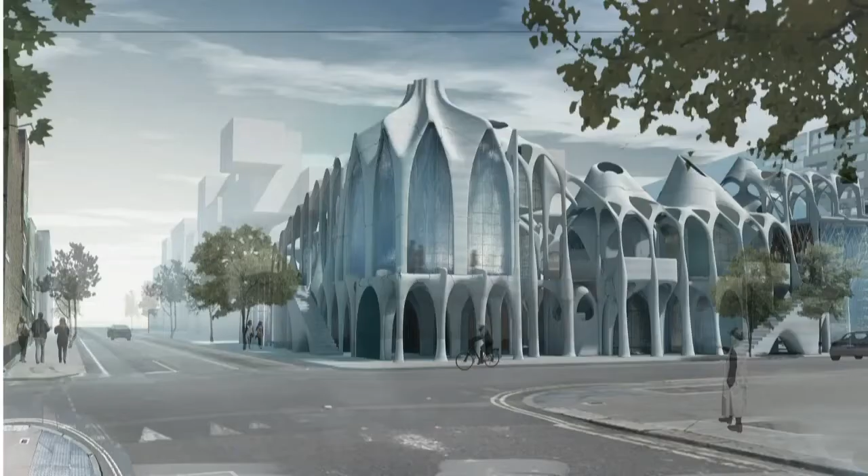We're part of Nahmad Bhooshan studio, which deals with the future of living and mass customization in combination with computational technologies. We're proposing a negotiated commune system that provides custom-tailored homes to cohesive communities based on their existing social networks in order to establish sustainable local communities. Using a relational model, our project looks at generating buildings based on social relationships in a community.

On the next scale down, we're proposing a customization system where the housing configuration is defined as a matrix of parameters, allowing the architecture to respond to daily patterns of each individual in the network. Additive manufacturing in clay-like materials using industrial robots is investigated as a fabrication technology that can deliver mass-customized integrated dwellings.

First, to expand a bit on the larger discourse of this thesis, increasingly modern cities like London are laid out for people who fit into a certain demographic. Young, single, high-income professionals who have very flexible lifestyles thrive in this environment. But what about the ones who are not so lucky to fall under this demographic?

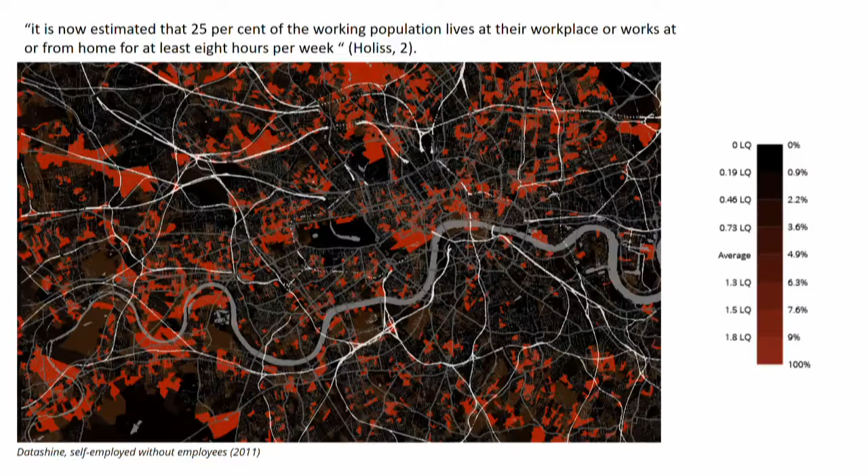This thesis investigates possible solutions for a user base that typically makes up the backbone of local communities, yet is routinely ignored by commercial developers: craft workers, small business owners, stay-at-home moms and dads, artists, people who are less flexible and tend to stay in one community for a long time, who contribute and depend on these communities for their livelihood. In the UK, an estimated 25% of the working population does some kind of work at home for at least 8 hours a week, but most housing projects do not address this segment at all.

One way communities have successfully created their own homes is with co-housing. The term is used to describe a model where communities self-finance and build homes, cutting out middlemen with commercial interests. In the UK, there are about 60 registered co-housing projects, some of which can be found in London, but it is far from being the norm. We see an opportunity here to reinvestigate the live-work typology in combination with co-housing in order to create an alternative housing model.

At the base of the research lies the hypothesis that human settlement patterns need to become an intimate reflection of their communal structures in order to form strong, sustainable communities. Historically, humans have lived in cohesive communities where they dwell and work together intimately. This is reflected in the architecture, which takes specific forms based on the community. We have looked at different ways to understand and analyze these patterns. Insight gained from complex network analysis methods and space syntax helps us develop the operational tool to approach architecture from a social angle.

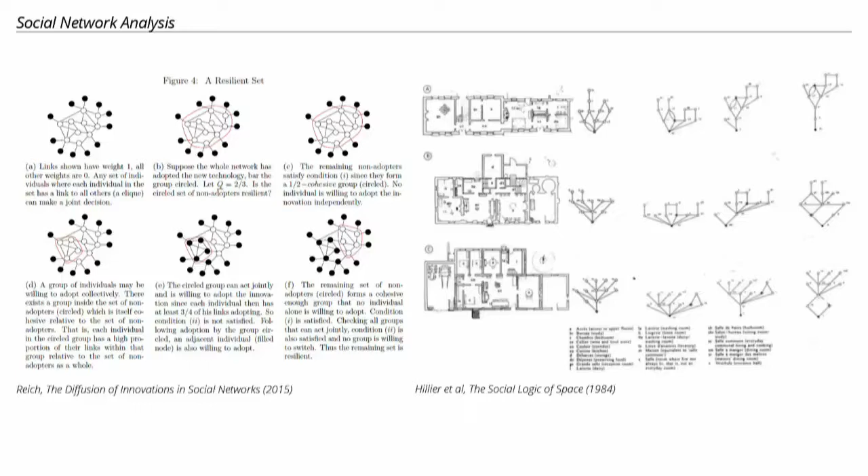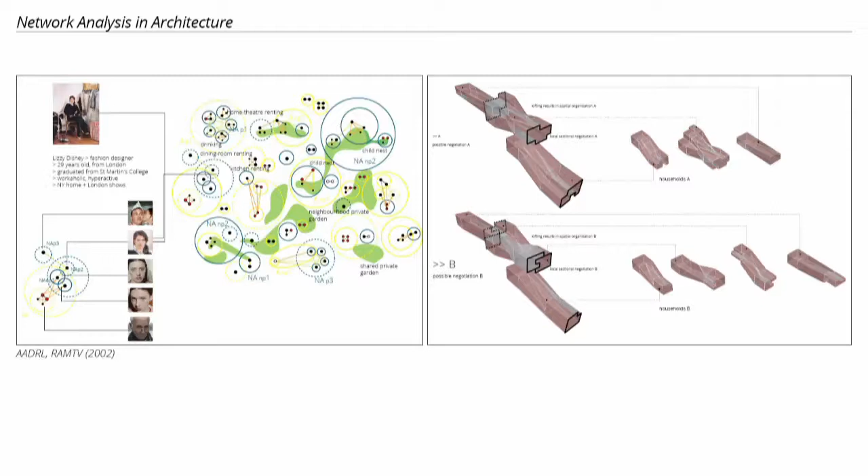The vernacular working home, as outlined by Frances Holliss in her book Beyond Live/Work, provides a base typology for custom-tailored homes. Historically speaking, there's a wide variety of custom-tailored homes that are optimized to the user needs. For example, the English Topshop or the Japanese Machiya are highly successful counterexamples to the generic developer blocks. A prior DRL project, RAMTV, explored the idea of working with a network of users in order to tailor a negotiated mass-customized solution.

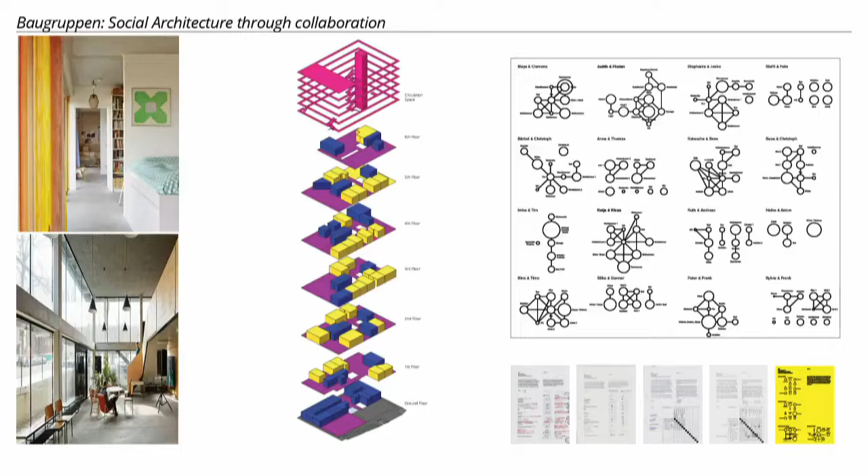R50, a co-housing project in Berlin, provides insight into how to design for communal building projects. The highly successful German Baugruppen shows how to engage with an existing community and deliver user-centric housing. And also, there's a huge potential in freeform 3D printing, as it can collapse several layers of complexity in the fabrication process. However, 3D printing at the architectural scale is still in its infancy and lags behind the engineering aspect. Our focus is on design application.

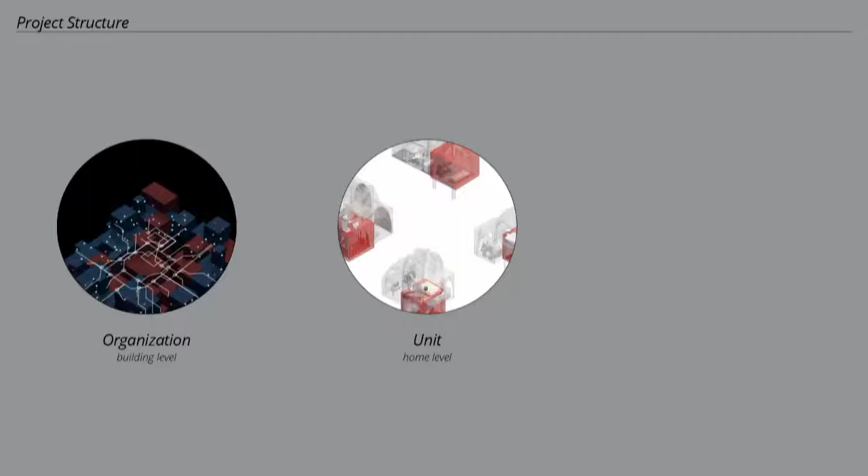As our architecture is a compression-only system, unreinforced masonry construction provides insights into geometrical constraints. The geometries developed by Gaudi, Guastavino, and Dieste provide case studies. Now coming to the project, the process can be broken down into 3 levels of development: the larger organizational level at the building scale, the unit level, which looks at the individual homes, and the structural level, which deals with the construction system.

All right, starting with the organization. During the research process, we have identified sites of varying nature. Our current testing site has been chosen for several reasons. It is located near Elephant and Castle in London's Southwark district. It is currently occupied by a luxury apartment complex, which is the standard type of development found in London today. We are borrowing the site to propose a hypothetical alternative that could bring more to the local community.

It is located right next to Pullen's Yard, a 19th century housing block purpose-built for craftspeople and traders. When manufacturing disappeared from this area, the workshops were converted by artists, designers and artisanal professionals into live-work spaces.

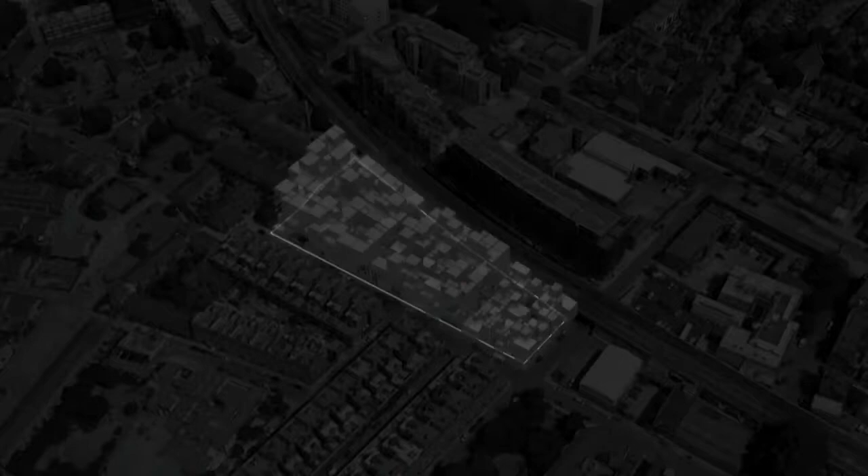Today, the complex remains an important anchor point for the local community, providing services and public events. We see our proposal as a contemporary addition to the community, reinforcing this vernacular typology rather than pushing it out of the city. The site is shared by 3 different communities, each with its own identity. We focused on one of them for the design development.

This prototypical community consists of 16 households or 35 people. Through a series of conversations and questionnaires, relevant data is captured in the relational roster. For each household, we record its existing size and composition. We also record the characteristics of the previous home and the desired spaces and their square footage. With a relational bubble diagram, we also capture how these spaces should be related to each other.

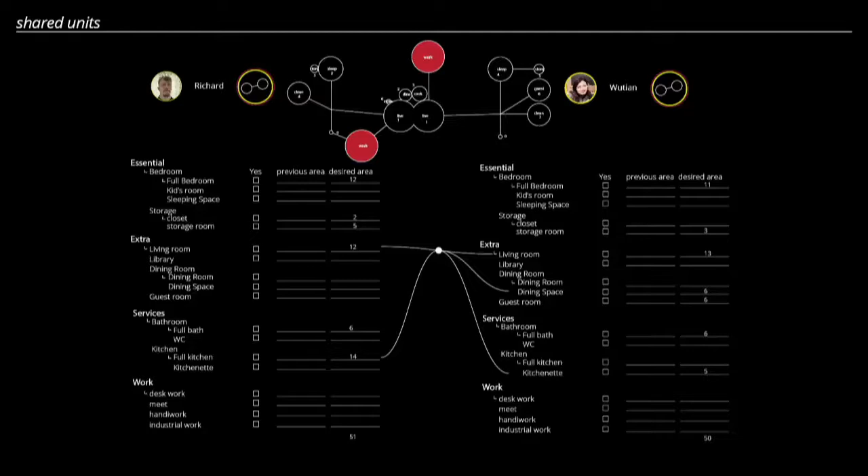Some households may be willing to share spaces in order to cut down on cost, but they might also have some kind of symbiotic relationship. For example, one of them could be a caretaker and the other an elderly person. In the same manner, the community is interlinked through a network of productive relationships.

The graph is useful because it allows us to capture all relevant information into one data structure that can be operated in an algorithmic way. The graph is multi-scalar, revealing more and different information as you zoom in. However, for the computational side, all that's really needed is a data matrix that records the connections and type of each node. One example is shown here on the screen.

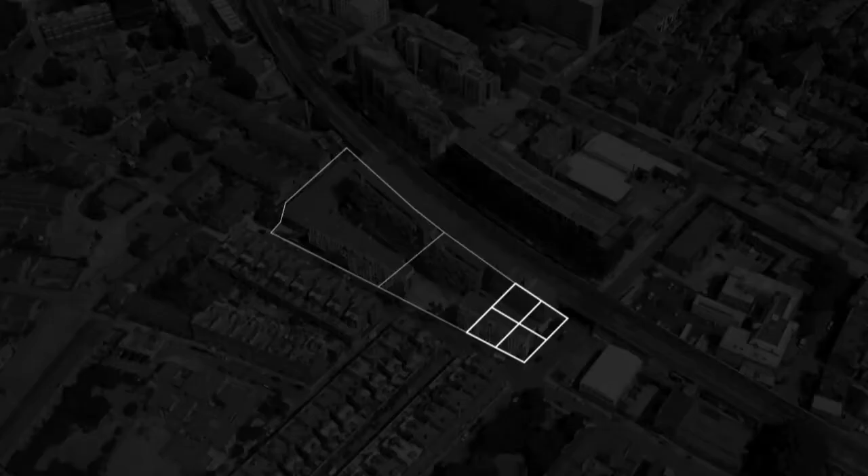Coming back to the site, it is first subdivided into a 3-dimensional grid. The grid acts as a world for a growth algorithm to operate in. A pathfinding logic is then used to generate schemes. Basically, we have a starting point where a pathfinding agent is seeded. Following its rule set, it places units at a specified interval, traversing over the site.

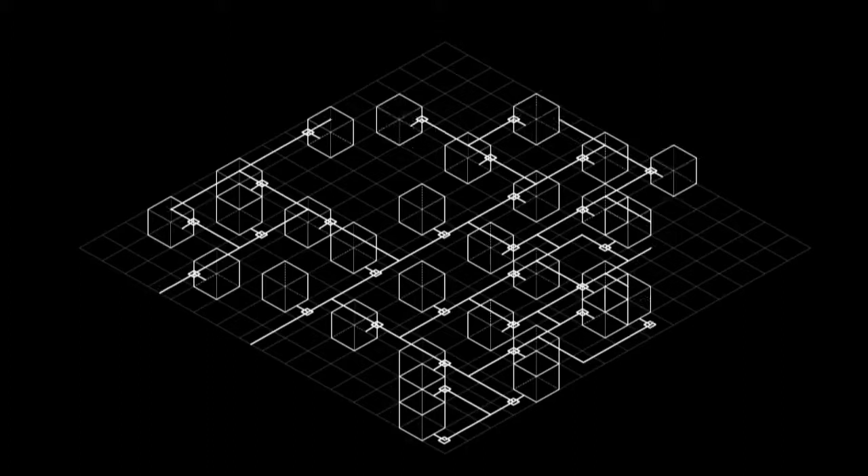The rules are simple, but they can be stacked to form more complex behavior. For example, turn randomly left or right when hitting a boundary, or branch every time a unit is placed. These rules give us distinct tree-like structures, which become the circulation of the building. The movement is further controlled through a cost-to-move system. For example, traveling vertically carries a much higher cost than just traveling horizontally.

For a test site, we use the rules: nodes are sorted by largest amount of connections, branch every time after a node is placed, and every unit has to touch the perimeter. Here's the same process shown again with each unit mapped. The growth logic is additive, so the placement of each unit is affected by the ones placed before it.

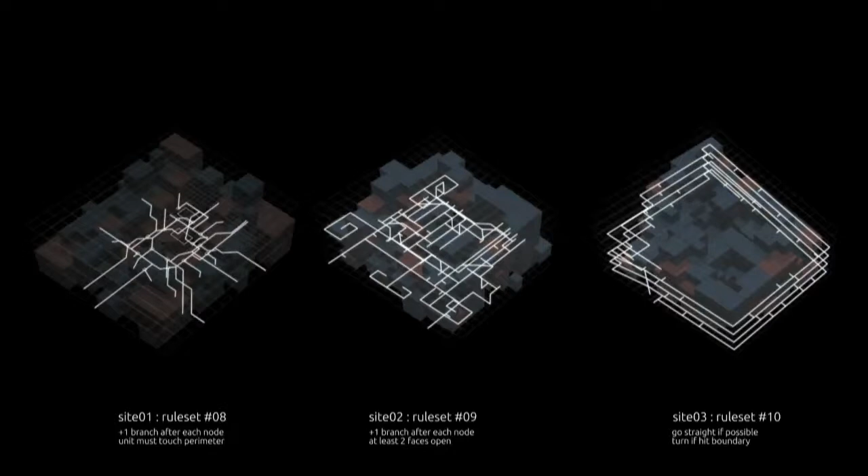Simply put, the algorithm can be explained as a game of Tetris in 3 dimensions, with the rule set as an operational driver. Here we have applied a different rule set to each site. You can see the resulting growth trees are very different from each other. The growth trees can be interpreted as the quality of the space. For example, site 1 has an active center hot zone, whereas site 2 has a more distributed scheme with active pockets. Site 3 has a very active perimeter with a private center.

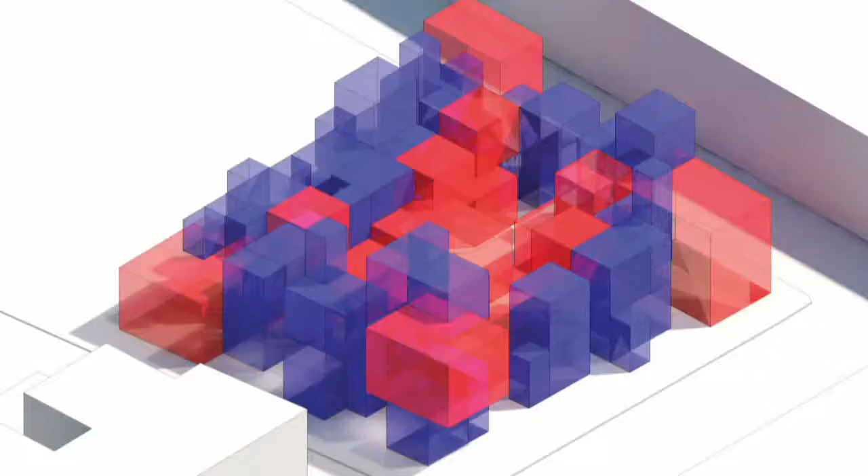Now coming to the unit level, based on the rule set, we get an organization of spaces that satisfy the requirements of the community. The actual units on site are a negotiated result where site constraints, unit requirements, and shared activities come together. Using a relational model allows the unit to adapt to the site while still maintaining its important connections. From here, a low-poly version of the architecture is inserted.

We have further developed a strip containing 5 units. The configuration attempts to match the original input given by the user, resulting in unique units that fit into each other. Shown here is the process starting from the initial data sheet and relational diagram to a 3-dimensional representation using metaballs, and finally the unit.

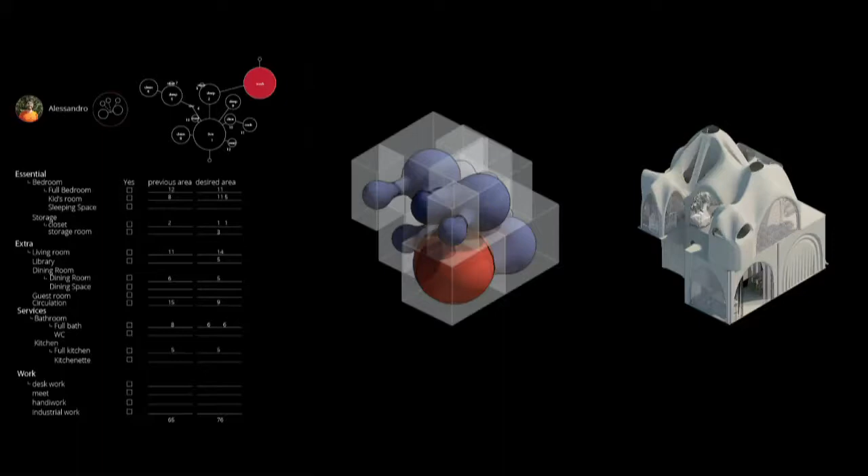Each home is customized based on the needs of the user. The unit comes with an extra programmable workspace, and depending on the user, it interfaces differently with its surroundings. In this way, each unit is given a further level of customization.

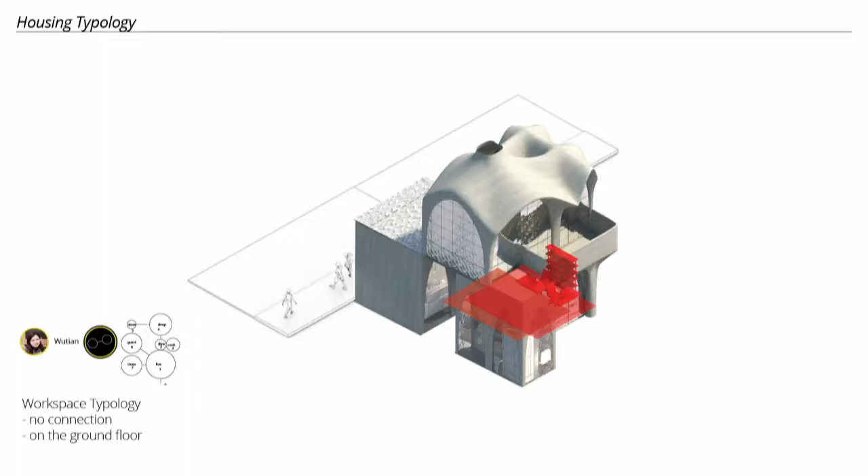Amy is a ceramic artist. Her unit is located on the first floor, facing the busy first floor common space, giving her works exposure to the local community while also helping her to build connections. Richard operates a small coffee shop on the ground floor, facing out to the street. He also helps Amy sell some of her work on the site.

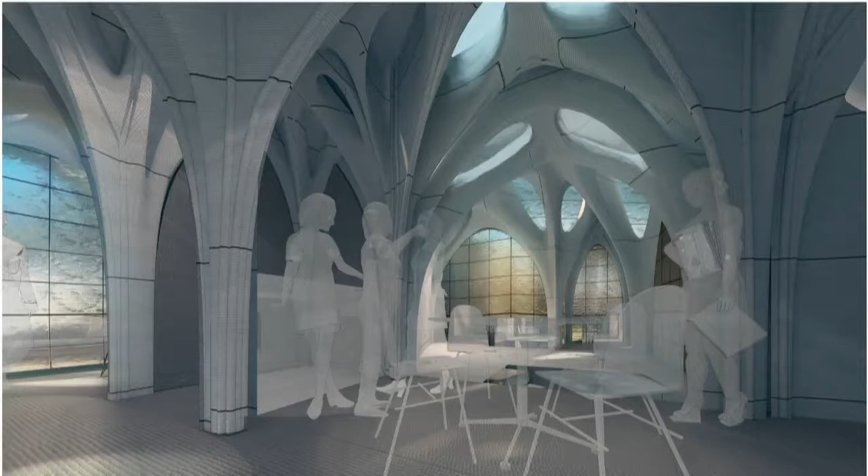Alexandro is the community manager. His workspace is on the ground floor, directly opposite the common meeting space, thus making him easily accessible to the community. So shown here is a shared living room between two units. The articulation of the branching of the ceiling allows different levels of light to reach into the unit, thus allowing us to optimize it for the activity underneath.

Here's the living area of the single unit. Here you can see how 3D printing is used to print different elements of the building, such as the windows, walls, stairs. The break lines of the 3D printed segments become an architectonic feature of the space.

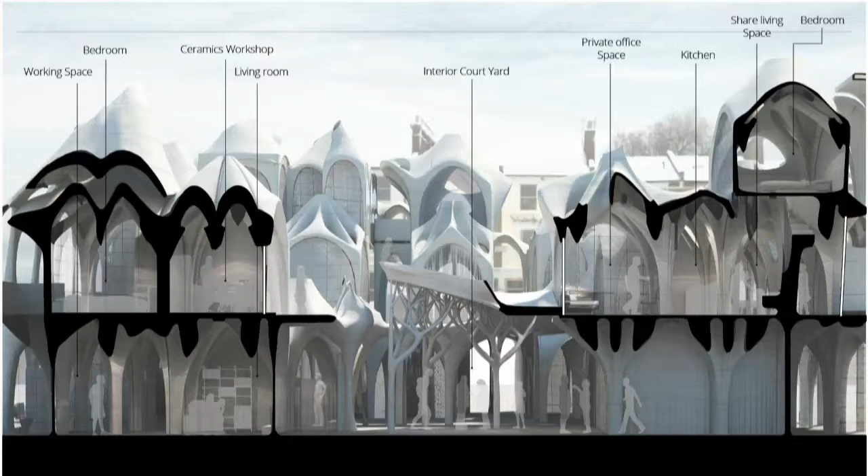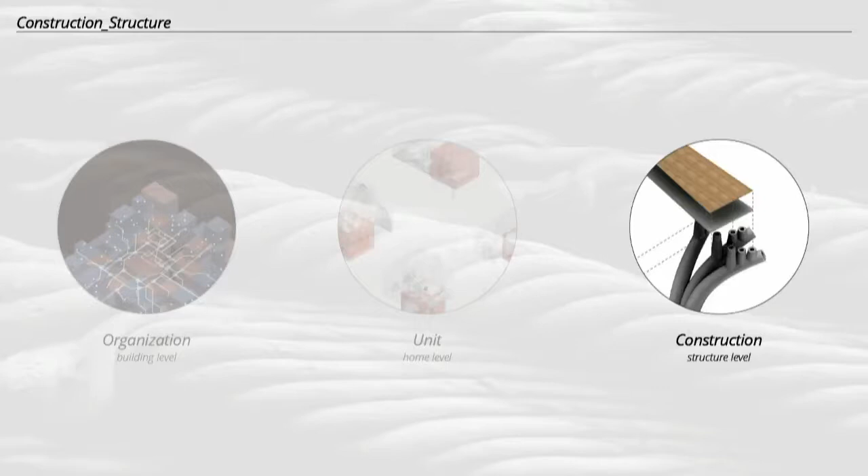Lastly, we come to the structural level. Using 3D printing, we aim to simplify the construction process as much as possible in order to make building homes less reliant on developers, while still maintaining a highly customizable system. We have developed a process where, starting with user requirements and social relationships, a building organization is generated.

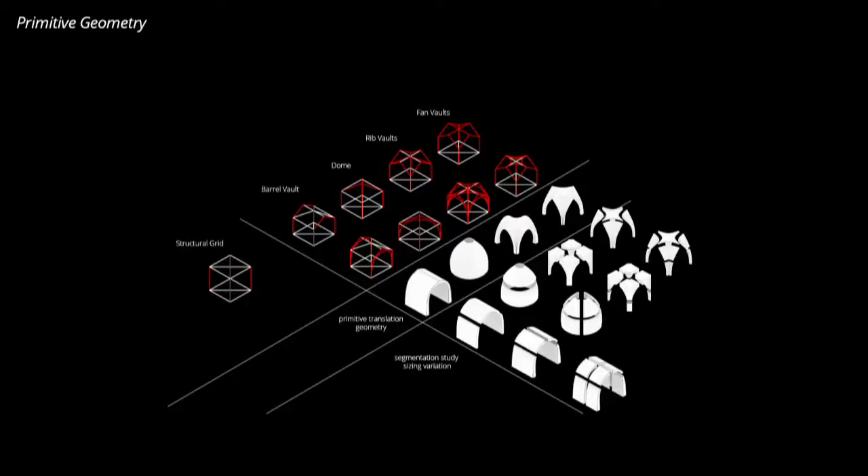Using the edge lines of the cubes, primary compressive forces are calculated for structural integrity. The resulting geometry is further segmented. Function and textures are added at last. The grid-based organization was chosen because it is developable, meaning we can extract structurally sound geometry. Here you can see how a single cell can translate into a variety of different structures, going from grid to structural center lines, to low poly geometry, to segmented printable pieces.

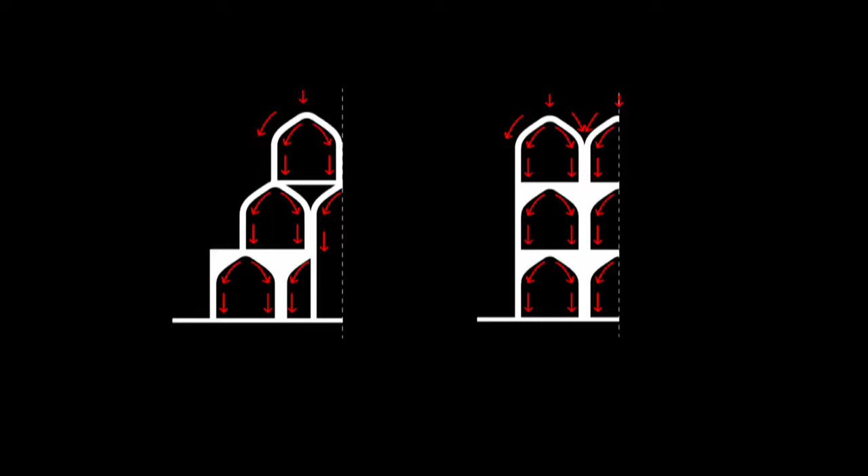3D printed clay and similar materials are very weak in tension. That's why we are borrowing insights from unreinforced masonry construction and other compressive systems. The grid-based aggregation allows us to extract center lines that line up structurally, thus optimizing the geometry to its structural qualities.

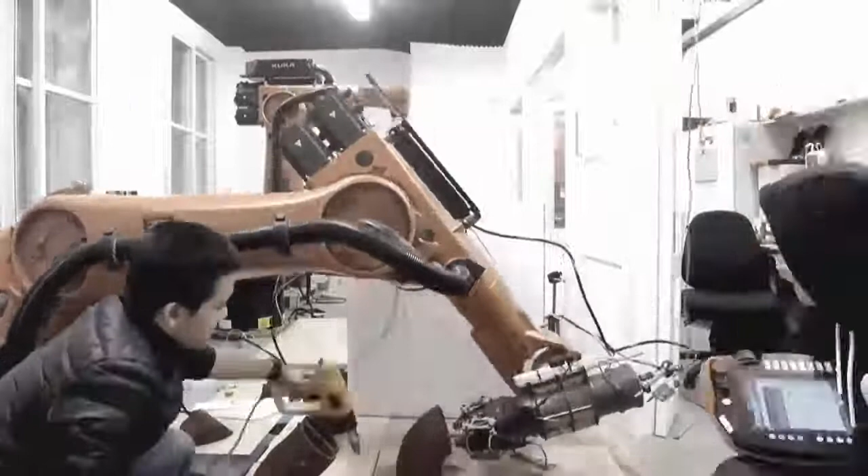We use 3D printing as the main fabrication technology because it removes a degree of separation between the end user and the construction process. Highly customized and very differentiated geometry can be fabricated without any added complexity. Using one single construction system for most architectural elements simplifies the process considerably, thus minimizing cost and effort, making it viable for a wider user base.

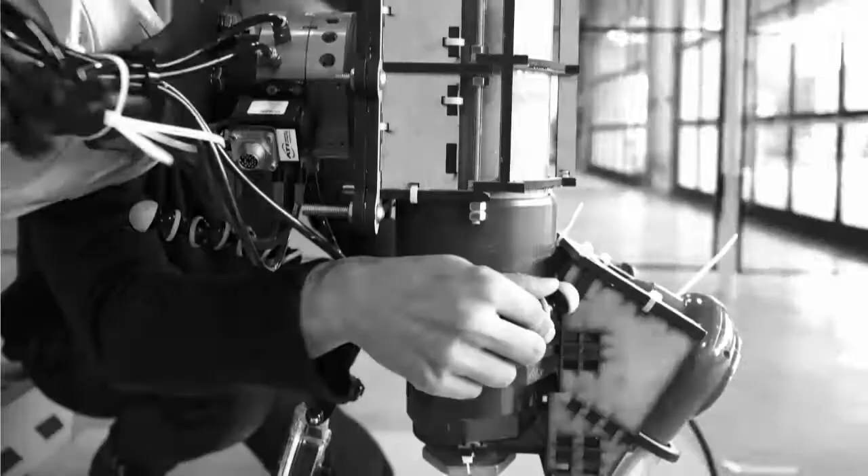In terms of construction, we are proposing an on-site fabrication system where the whole construction assemblage comes as a streamlined package, portable on a standard cargo truck. We chose to develop a pneumatic system with clay as base material because of its low cost and because it can be built using the limited resources that we have. Clay is also easy to find locally, not to mention that it is the oldest building material in the world.

We also understand clay as a proxy material for materials with similar behavior but much higher technical difficulties, such as concrete. It is important to mention that the material has inherent limitations. Not everything is printable. The first step for us was to establish these limitations. We have developed parameters in order to build a geometric system that is inherently constrained by printing limitations.

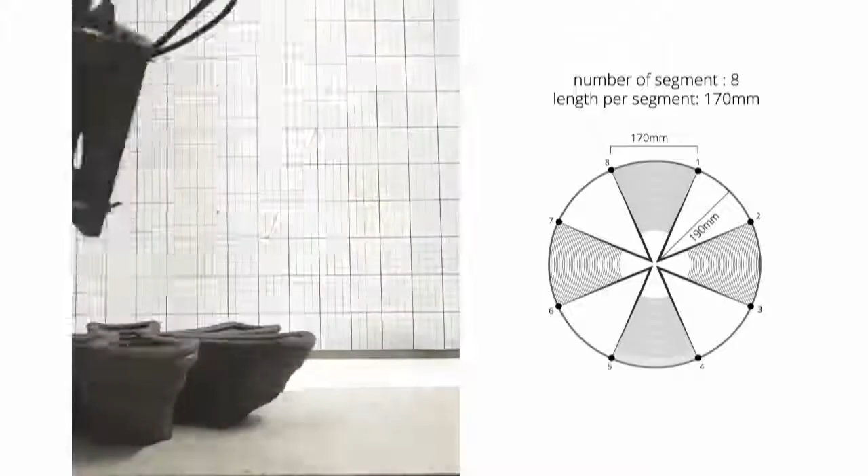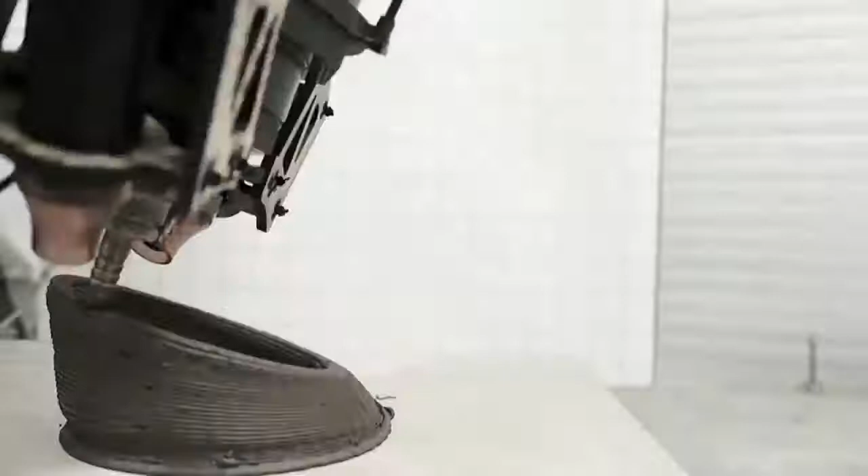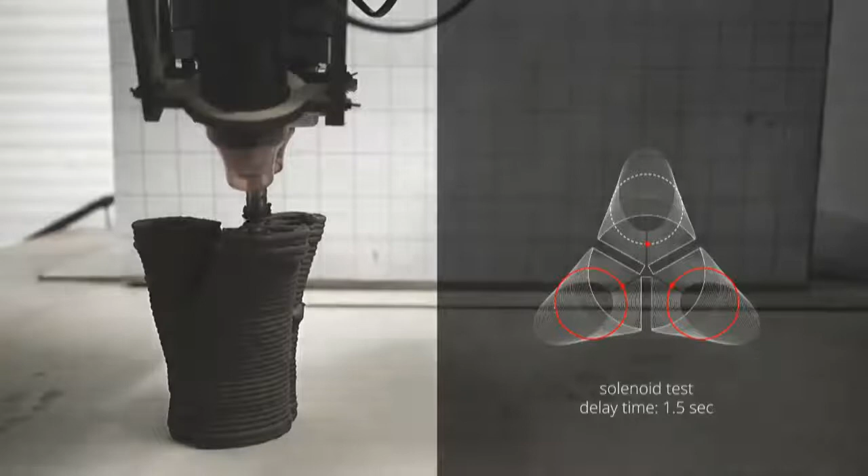Parameters that we have tested are maximum overhang angle with simple layer by layer, maximum angle using non-horizontal planes. Here we have also discovered that the accuracy of the tool center point, or the TCP, matters. Same experiment with fixed TCP adjusted to the shifting planes. And also flying layers for openings or perforations and its capacity to recover. Branching geometries using non-continuous printing. So based on these tests, we get certain forms that are printable and useful.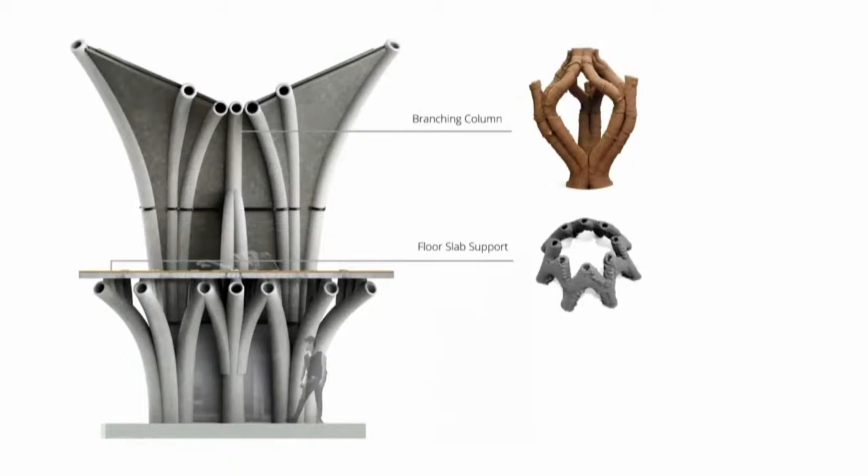3D printing makes it possible to fabricate different elements of a building using one method, that includes structural elements such as columns, walls, and floor support, performative elements such as different ways to create openings for light and ventilation, and mechanical elements for plumbing and electricity.

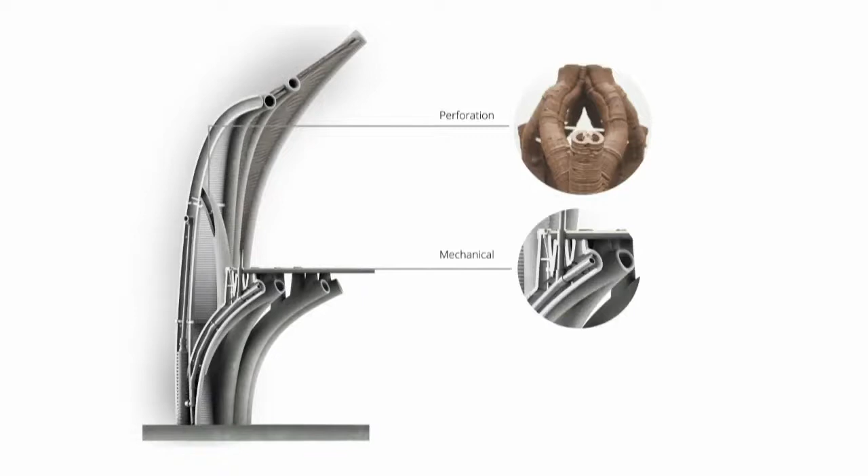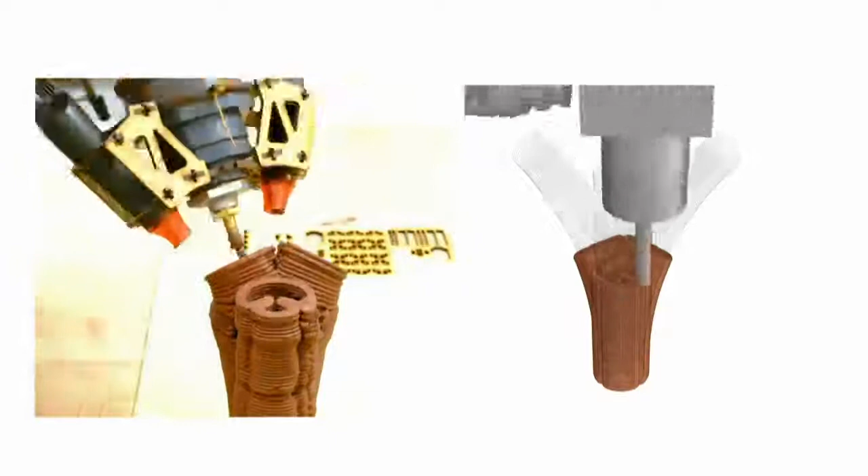And ornamental elements, which basically come for free as a side product of the printing process. The structure is segmented and not printed all in one go because of material limitations and because printing at an architectural scale has complexities that are hard, if not impossible, to resolve with one solid print.

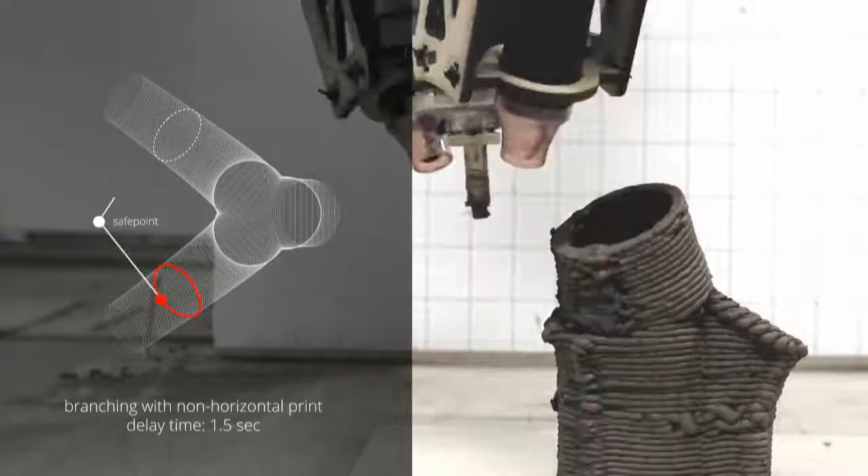First of all, segmentation allows us to limit failure to local prints instead of the whole structure. Secondly, timing is very important with materials that need time to dry or cure. With all of our larger prints, we have to let it dry periodically and after a certain height so it can support its own weight. And third, with our branching structures, choreography is an essential part of the print. For example, safe points have to be added in order for the robots to avoid crashing into the print.

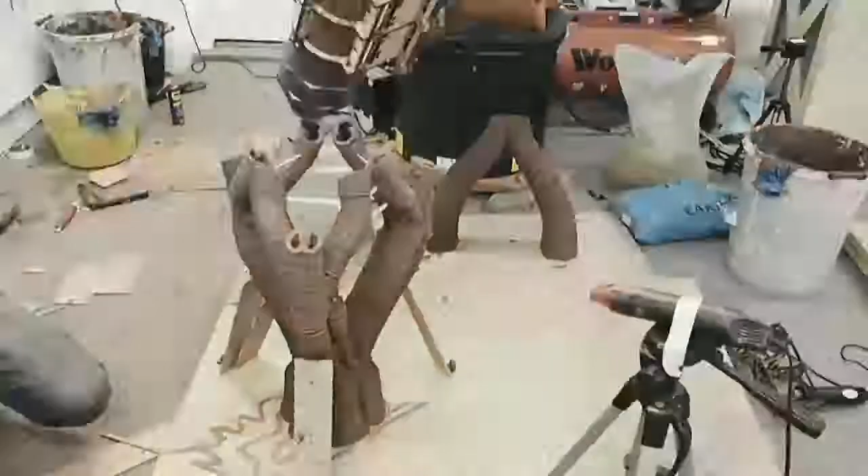As a result, we have developed a process where the structure is printed on site, but it's segmented in time. The first shows the printing process of our final prototype, where we tried to combine all the techniques we tested. It is one single object, but segmented into 3 prints. In between, it is allowed to dry, but also it optimizes the toolpath for the robots.

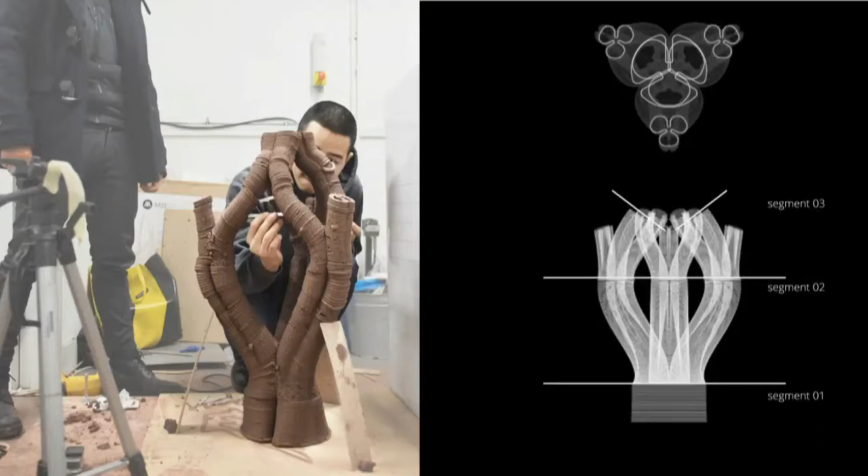The size of segments depends on the material. For example, glass has to be printed in a high temperature environment, and it's inherently limited to a kiln, whereas concrete can be printed at much larger scale. To this end, we studied different ways of segmentation and how to resolve connection points.

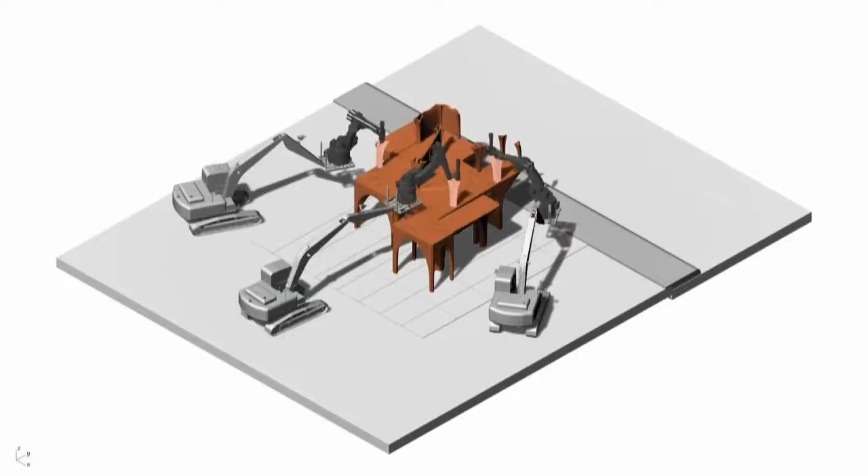This video shows the construction sequence of one unit. Starting out, the truck carries the robotic arm and is constantly calibrated by beacon signals. The segments are printed following the choreography of the robots. Shown here is the printing process of the main structure. So this concludes our presentation.

We'd like to give special thanks to our tutors, Theo, Shajay, and Alicia for their insights and advice, and AKT II for structural consultation. Also Angel for generously letting us go wild in the robot room, and of course our phase 1 helpers, Sam, Cesar, and Charlie for helping us pull together at the end. Thank you.

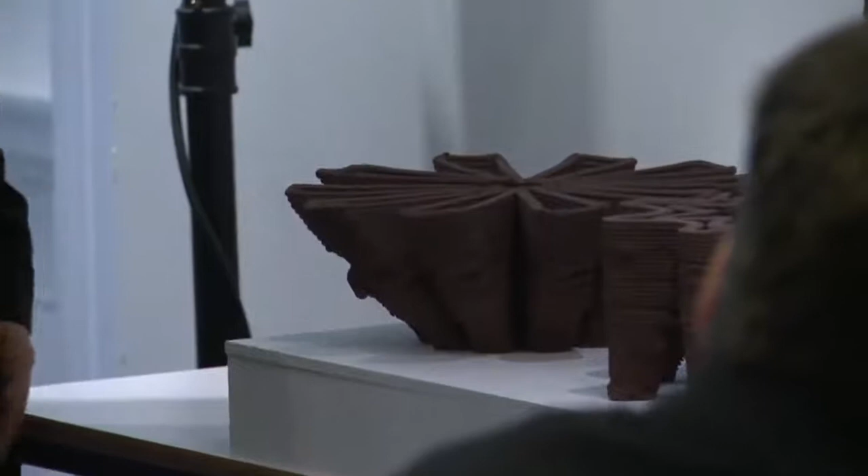So right here it's a series of study models that we've done with the flying layer for the opportunity to create a perforation and an opening. This is the series of studies for the layer by layer overhang, how much angle can we go. And this one is a series of branching models where we study the choreography of the printing robot.

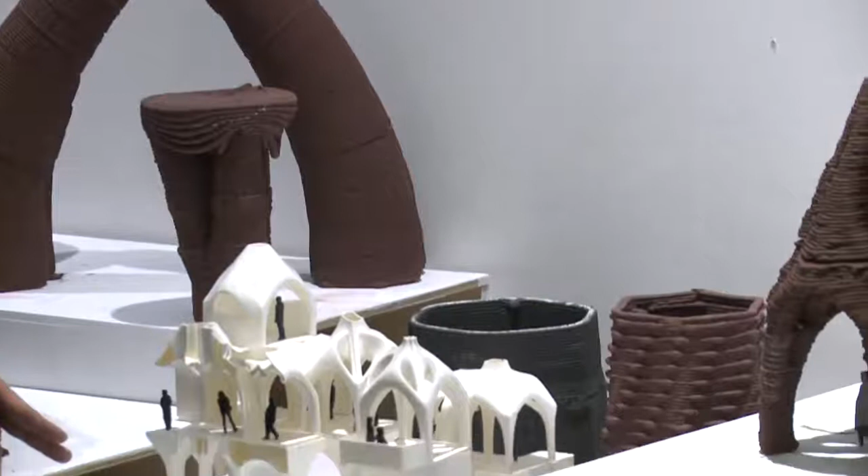This one is the 1 to 25 model of some units in our scheme, printed in plastic, and this one is the clay version of it. This one is the pneumatic clay chamber that we developed, and this is the series of plane shifting studies to see the limitation of the printing of the material.

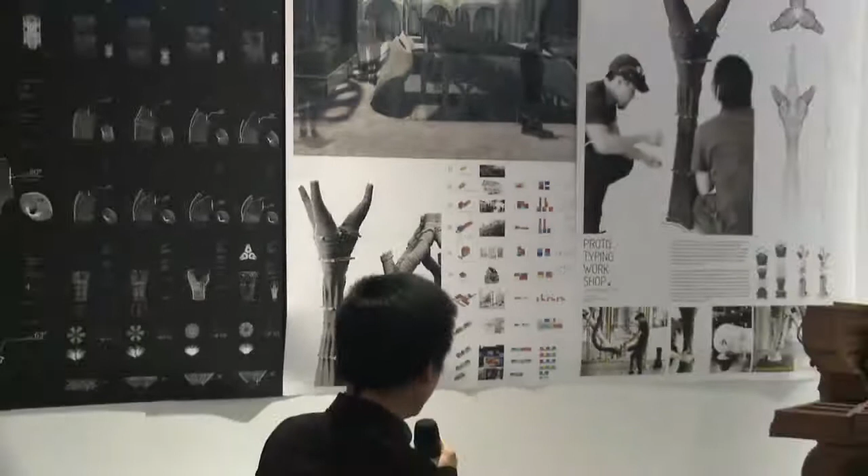And right here is the picture of our 2 big prototypes that we cannot have today. This one we did in Boston, and the other one, unfortunately, collapsed during the New Year break. And this one is the segmented model where we consider the center line, the cutting line, to counter the center of gravity to achieve the column to slabs.

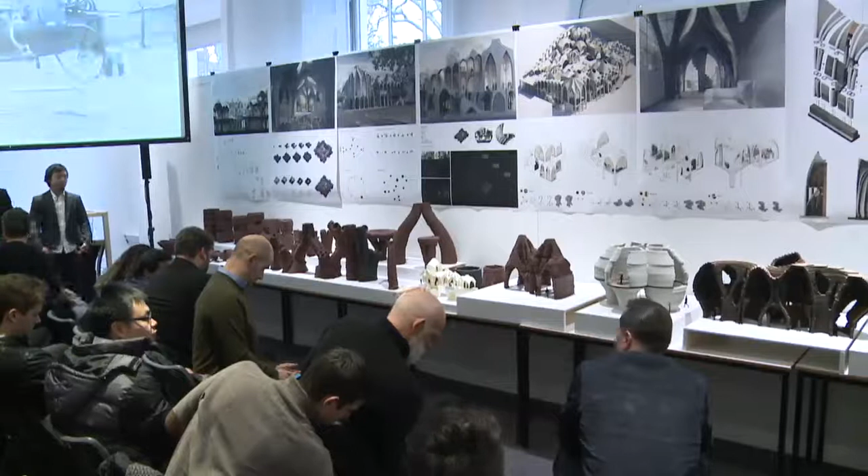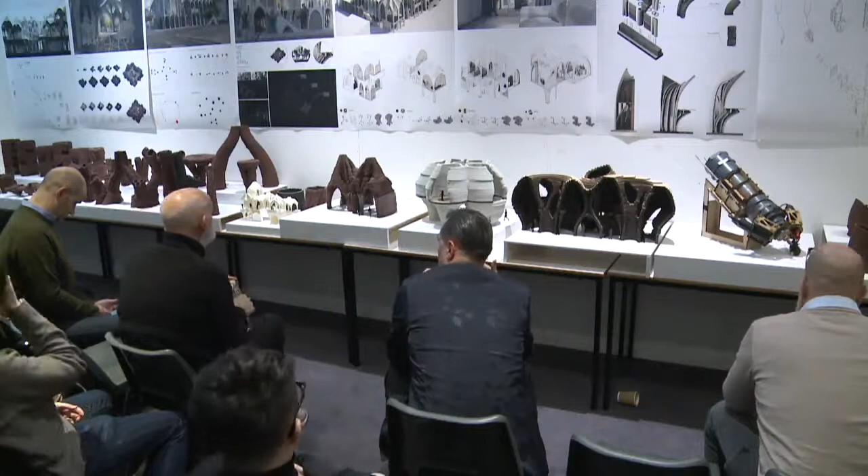Well, it's really fantastic, absolutely amazing. I mean, the last team before lunch hit us with this kind of fantastic entertainment and visualization, but I think you're hitting us with the most mature, intelligent, worked through proposals which could step into the market right now, but be disruptive in that market. I'm very, very impressed with what you're doing, and I think it's 2 projects, but the way they converge is very, very important and strong.

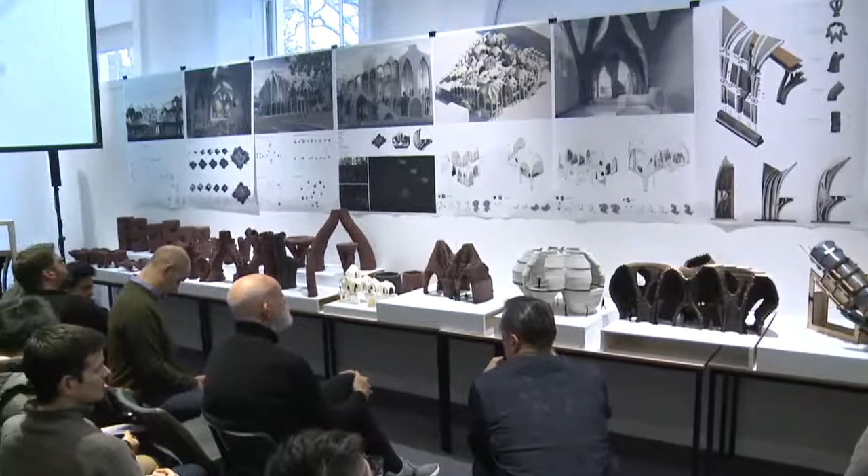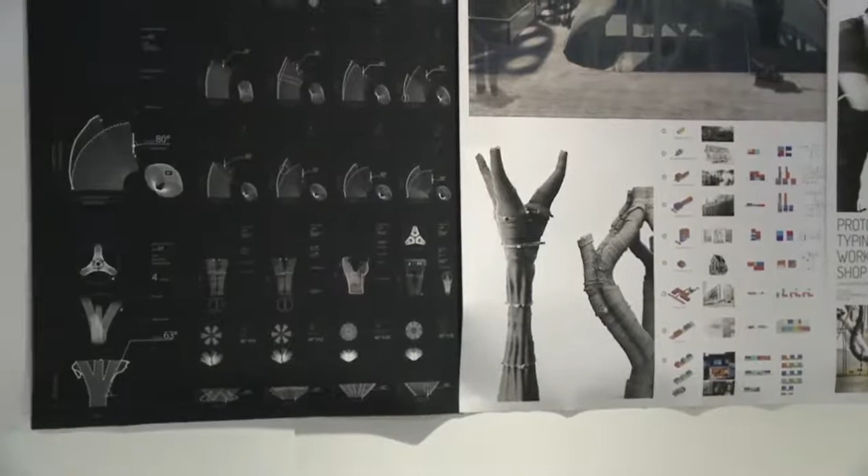You have that very sophisticated programmatic entrepreneurial venture, the social network logics, not only the idea, but the way you bring in data in a sophisticated way, the way you then use sophisticated computational algorithms. You also know the history of some of that from Hillier and social logic of space. Actually, Julia is sitting here who's contributed to this, and it's great to be an institution where you have that kind of depth of experience, and then you have that amazing research on the 3D printing, folding in with the sophistication of Philippe Block's research group, structural logics, compression only.

I mean, there's so much that comes in, and it should also become clear that this couldn't have been just three students. There's a kind of depth of history within this room and within support systems. It comes together as something absolutely compelling and unique, I think, in the world of students. And of course there could be many different systems which could connect to this, but it had to be a parametric system, because the variability and depth and intricacy of tailoring you talk about on the social side, on the programming side, is matched up with the huge amount of variability and the tailoring capacity and last-minute readaptation on the fabrication side of things.

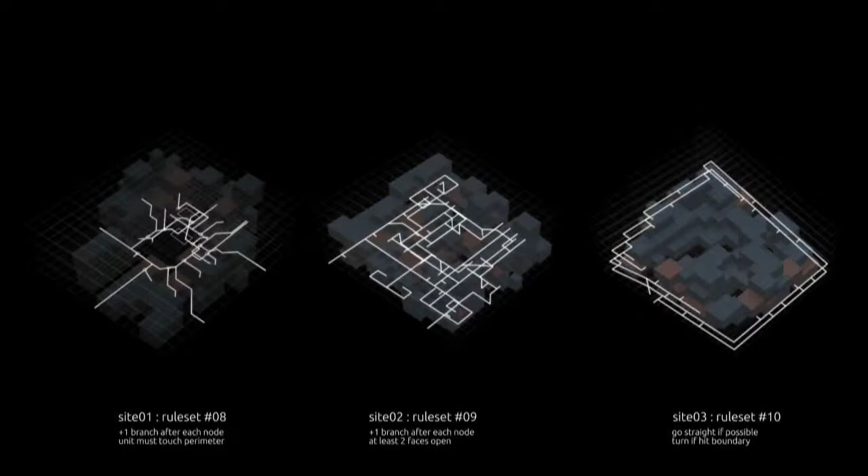And this is a kind of super tailored, yet through robotics, it will be as cheap as mass production, because once you have invested in the robots, and we're always challenged with this in terms of cost, this is actually going to be cheaper than anything else, because there's also structural optimization, minimizing material. It's really on-demand processing where you don't have to have big stocks. It's kind of the Toyota model of delivering just in time. I mean, it's really very, very sophisticated and compelling.

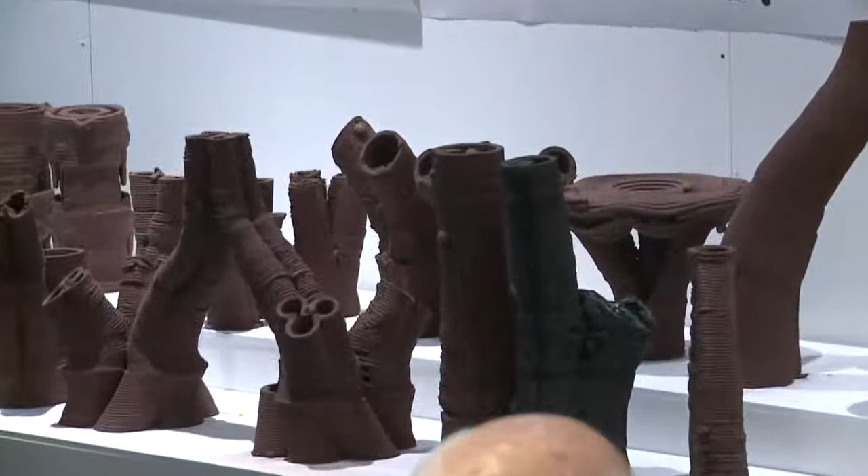I mean, wow. I had one question though. How are you burning these pieces? Where's the oven? Yeah, so we're thinking it's a set of materials. So clay, we're looking at vernacular mud homes, which don't have to be fired. But then, obviously, pieces that are exposed to the elements have to be weather resistant. So those would be either in concrete or maybe shingles in fired clay, which is basically ceramics. Yeah. But obviously, however big the oven, it has a size limitation.

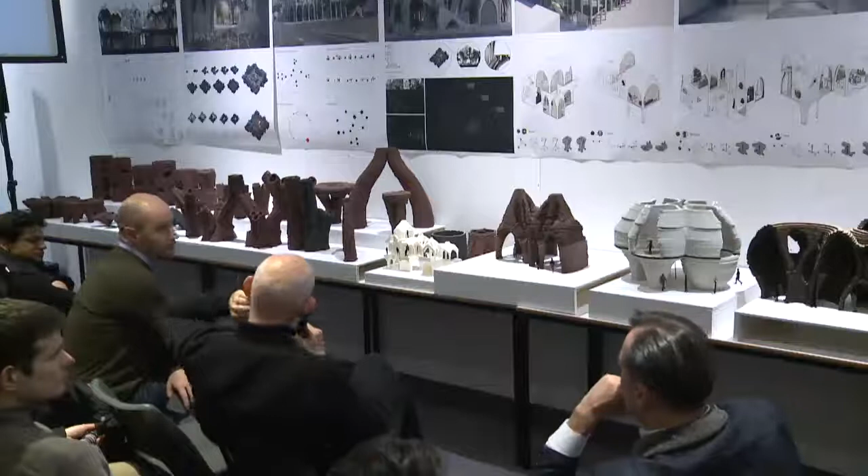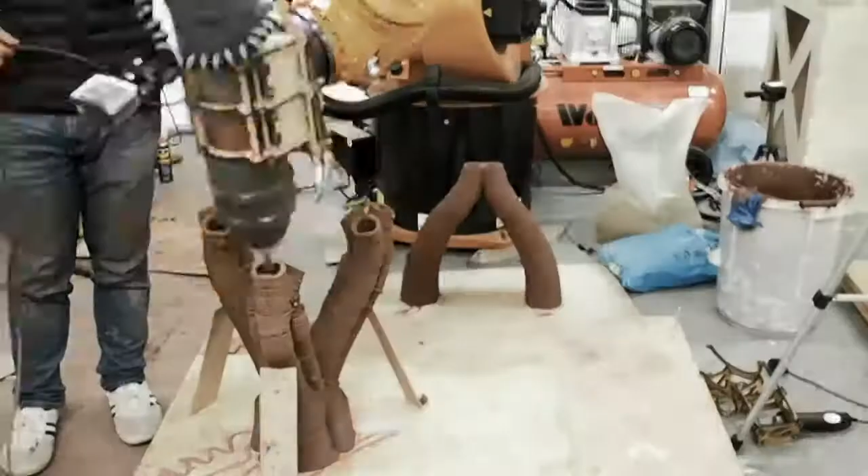Yeah, I wonder if you could just mix materials, you know. Could something be self-fusing, self-firing? I don't know, is there something, you put phosphor into it, or something that is not dependent on an archaic process like a kiln? I wanted to ask you a question too. In your process, which is very accomplished, by the way, how have you felt about imprecision, about imperfection? Because we live in an age of really high emergent perfection in the things that we build. What's your feeling about that as architects? I think we can live with it. Part of the printing process, you just inherently get mistakes in the print, and those can actually become really beautiful textures. So it's like an added bonus to what's being built.

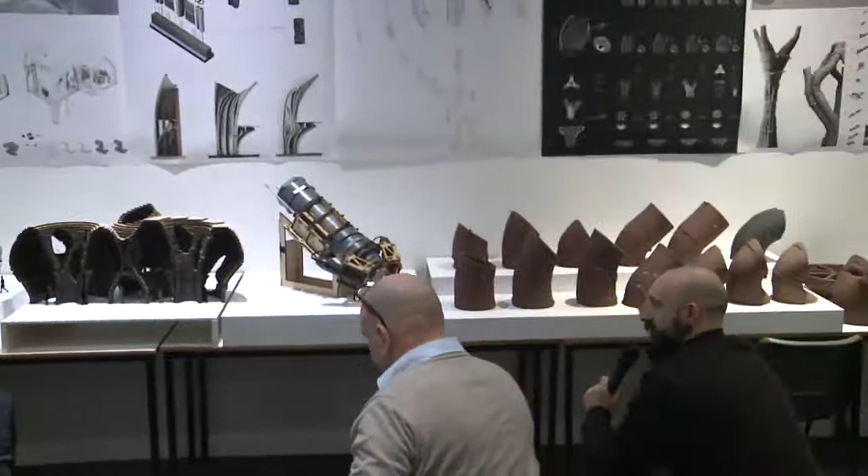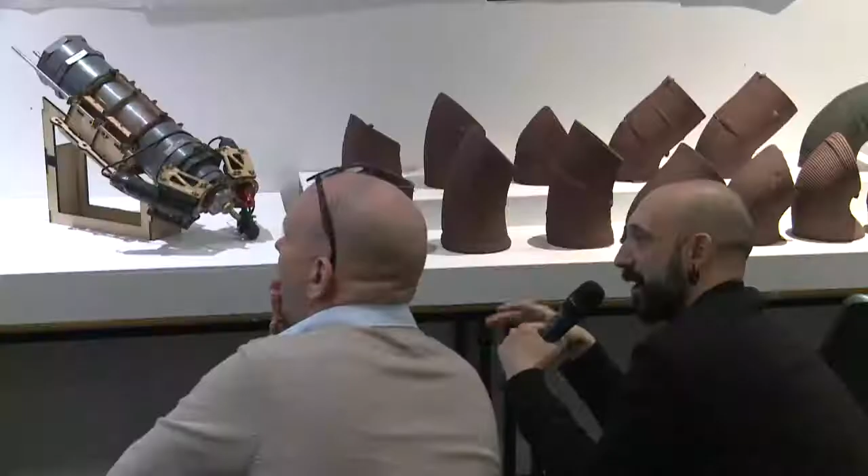I think it was really super amazing. I think, though, in the end, for me, one thing that was missing to all this sophistication is a level of control over these, not mistakes, imprecisions in a way, which are inherited from the process, but you have no control over them. And I think it would be quite interesting to have some kind of computer vision system to help you understand exactly what this material is doing while you print it, especially as you want to bring things on site, and probably a robot cannot be registered so easily on top of a machine like that. So I think you need some kind of computer vision system, and maybe then you could really control these imprecisions and control the aesthetics, which at the moment is a little random.

There's something that struck me, and it struck me yesterday in one of the projects as well, the folding aluminum surface, which looked like tailoring, like making clothes rather than building. And here again, you have something very interesting. Let's assume robots are modern technology. Let's say 3D printing is modern technology, and you have modern technology producing a vernacular image. And I find to some extent that the apotheosis of modernity would be to get rid of the look we all typically associate with modernity, a very fascinating thing.

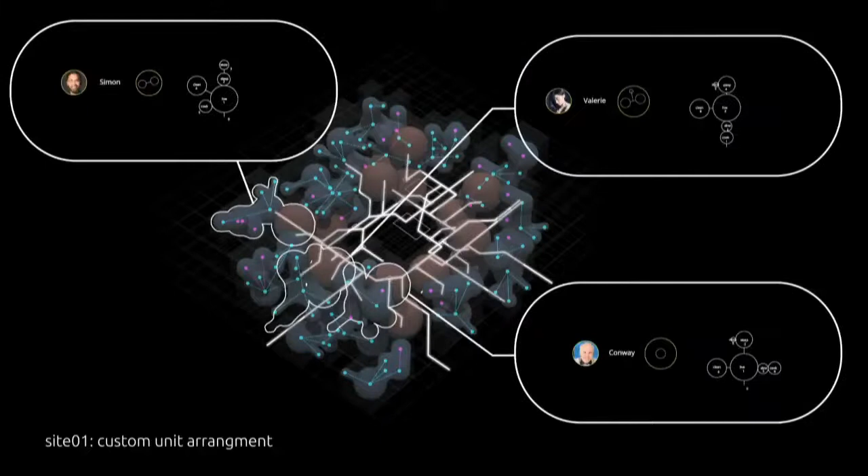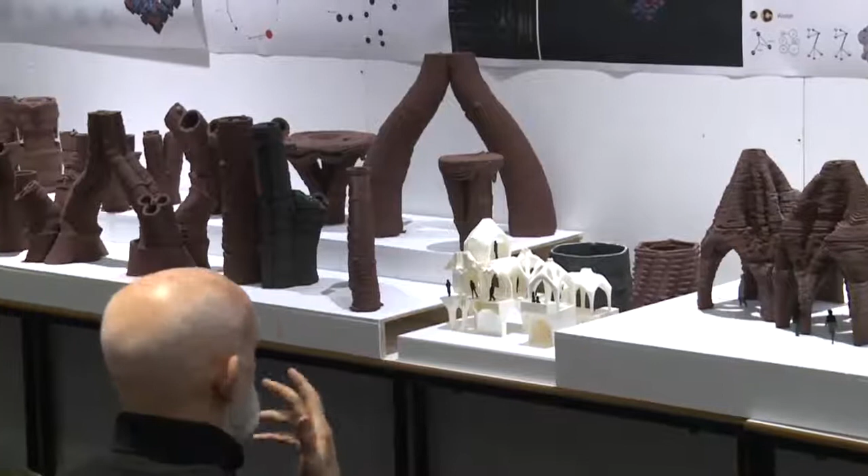And on top of that, looking at these spaces, they're phenomenal living spaces, actually, and they look highly traditional, highly homely, with an extreme sense of belonging, beautiful, very spatial, old-fashioned, but it's an old-fashioned type of space which is a result of the newest technology. And I find that a wonderfully explored paradox, and I think your project, in a way, illustrates it beautifully.

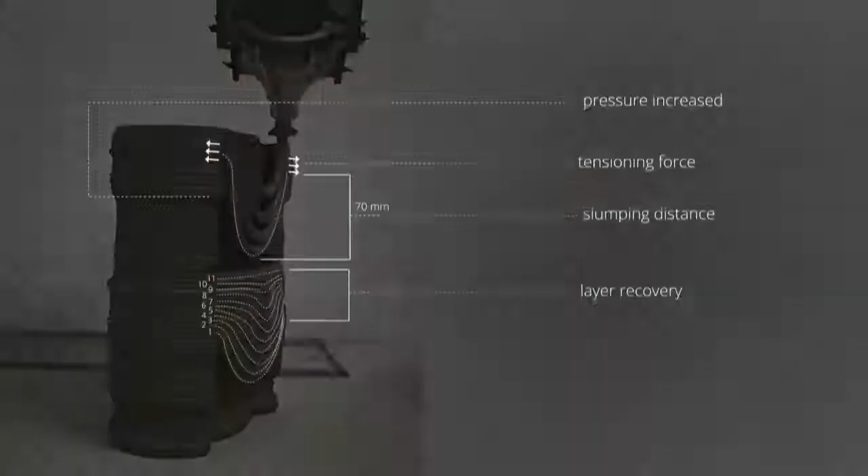Yeah, I think there's also a limitation in this to some extent, because if you look at what Philippe Block delivered in terms of RhinoVAULT and his conceptualization and algorithmic translation of compression-only systems, that he can take the plan libre, the free plan, and yet optimize a shell configuration onto that. And that will look very organic and very different. Why this comes out, I mean, it's cute and it's elegant.

In your case, since you went for the simple model, you went for the cubic base frame and maintain a lot of symmetry in the individual units, there is variety, which I love, and I wonder where this is coming from, because you have many different ways of covering, so that indicates it's not a single optimization. So that's something you maybe want to address.

But I think that paradigm of the compression-only way we can do that now can be much more free-form and organic looking, and you could overcome, if that was a problem, the traditional vernacular look, which is based on that base module. And maybe the base module was, in the end, something you could have also questioned. And there will be larger spaces where some of these cubes congeal into a larger, maybe more amorphous footprint, social space, and at that point you would have a rather different vaulting pattern emerging.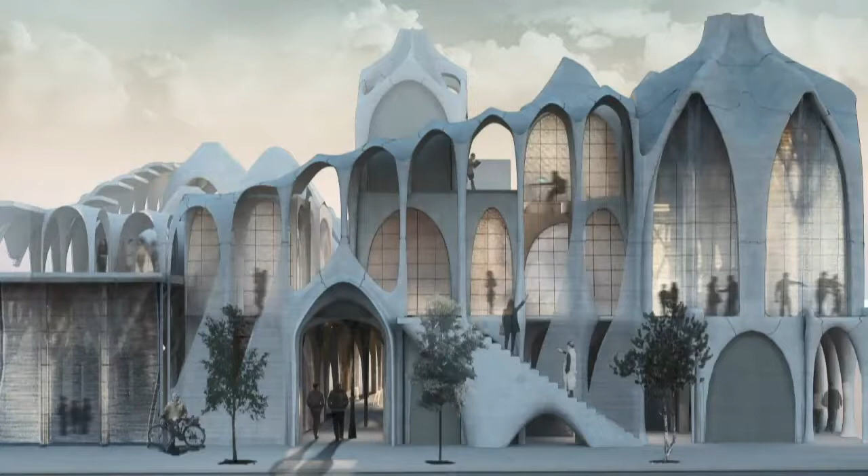Just as Patrick's explaining that, I'm quite interested in material morphology. I can't stand things which are sort of just made out of one material. So there's that idea that maybe for the higher compression spaces, you use concrete. And as you move up the scale in a tour sans fin, the Nouvellian way, you're applying fenestration to these structures. But you could look at that morphology of density, weight, and light.

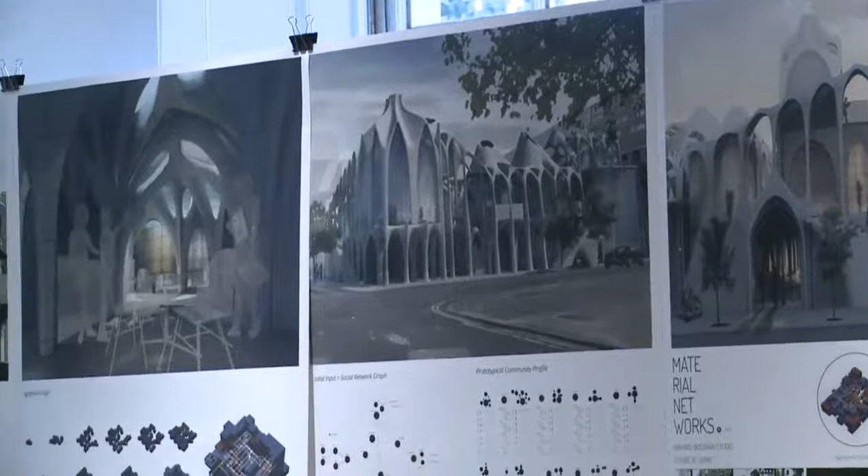And I think it's amazing, because I think it's so buildable. I mean, I could see this made, and you've got to build something. You do. Because you've harnessed everything, what Neri was doing and everything. It's all there. And I think as we were explaining, there's a whole new dialogue between past, present, future. It's a sort of fast forward, pause, rewind thing going on, which we need to do, I think, within the fields not only of architecture but design.

Yeah, I want to congratulate you for this research, which, as was said, is really good and really substantial and precise, actually. Realistically speaking, this thing can be built with concrete 3D printing, and I know a bit about it, obviously. I don't think my company can sponsor such a big thing, but its technology would definitely allow it in any case. So apart from the fact that you started from scratch, you have been your own extruder, you have made a very interesting research on morphologies, etc.

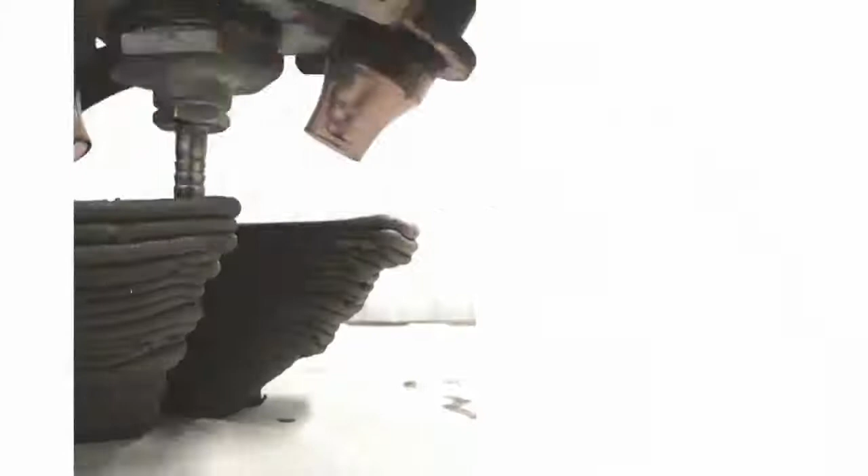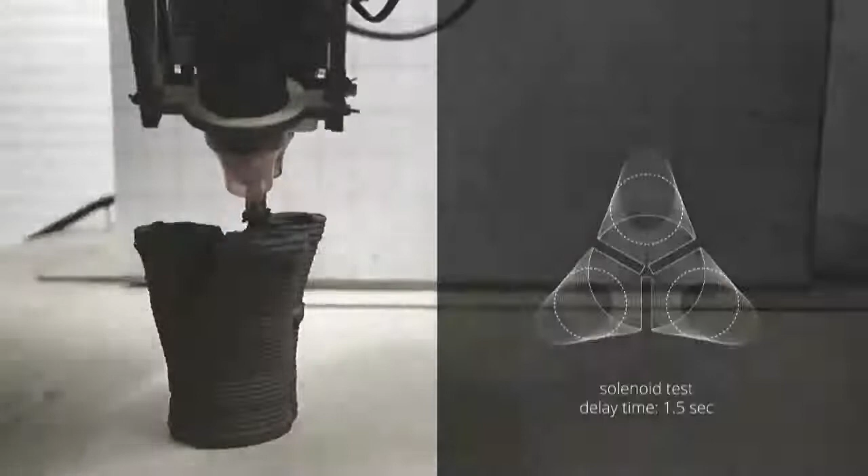I still wonder why we should only address the issue of 3D printing through a compressive-only logic. I think at some point it's a limitation in the possibilities. Obviously, it's a solution which comes to mind at first, because these materials have absolutely no performance, no capabilities for tension or even sometimes torsion. It's pure compression, even if clay is in fact more or less nothing, because unless it's fired, the mechanical properties, if you don't add some other material into it, are really, really weak.

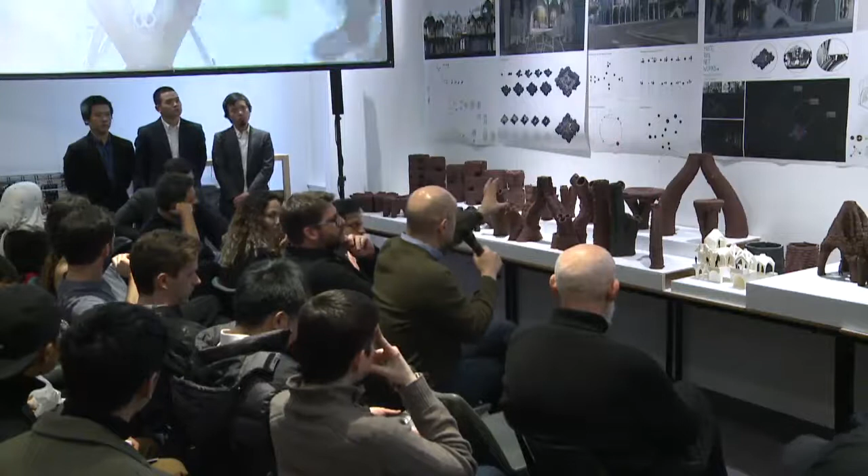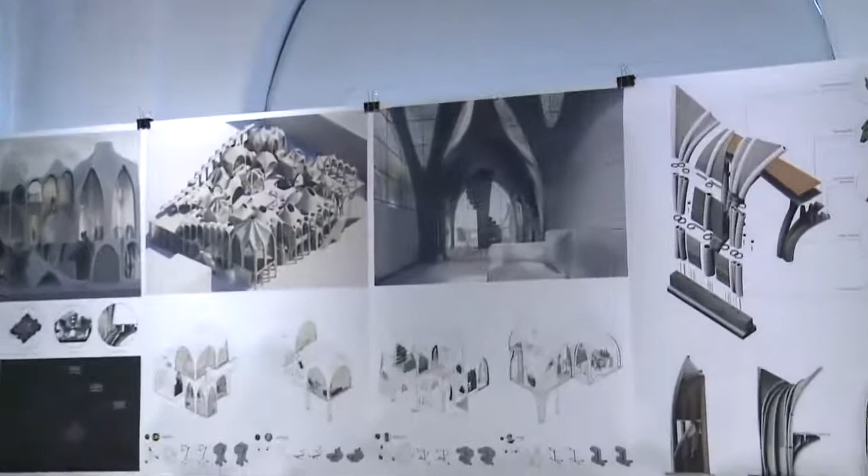But probably now it's time to engage into an approach of 3D printing which is more hybridized, which is also making use of some other constructive components, other paradigms. Also because it's lovely, but at some point in terms of shape, it always brings us back to this kind of shells and church-like morphologies. Ultimately, I think we should now engage 3D printing with more paradigms and say, okay, compression is fine, but even if we fail, let's try to add some other structural dimension to this logic. Otherwise, we might stick to this vault and compression-only aesthetics maybe too long. But the research is just amazing and super strong.

It brings to mind what Ross is saying: there could be multiple materials. The same system could deliver concrete and then it could deliver the clay on top. And these experiments here with the cantilevers, you actually will need tension, a tension ring, and that part could be up to here, it's concrete, and then up on the next level, it is going to be clay.

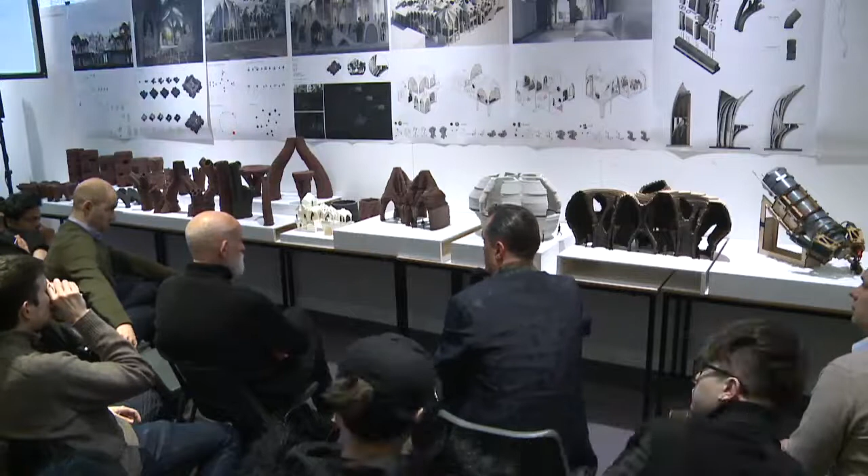And we do like the constraints coming in. The material constraints, the structural constraints, the fabrication constraints, that's where we like these lines, and we might start to like certain deviations. But also what you have here is deliberate ornament, slowing down the drooping; this kind of material computation is in the model. And the more you have this, the more you will not notice anymore what becomes defects and deviations. And then the concept of control comes in.

But I think what is beautiful here is that the idea of factura, of tectonism, like we discussed yesterday in the lecture, would become even stronger if you had two different materials. And then having a strong morphological bifurcation in the project of these two morphologies, and the idea of material dependency, and that correlates then strongly with materiality.

So this idea of system correlation and morphology with materiality would become stronger if you had that idea, and you've talked about it. There will be concrete and there will be multi-material, and these materials will then have a kind of switching of morphological range.

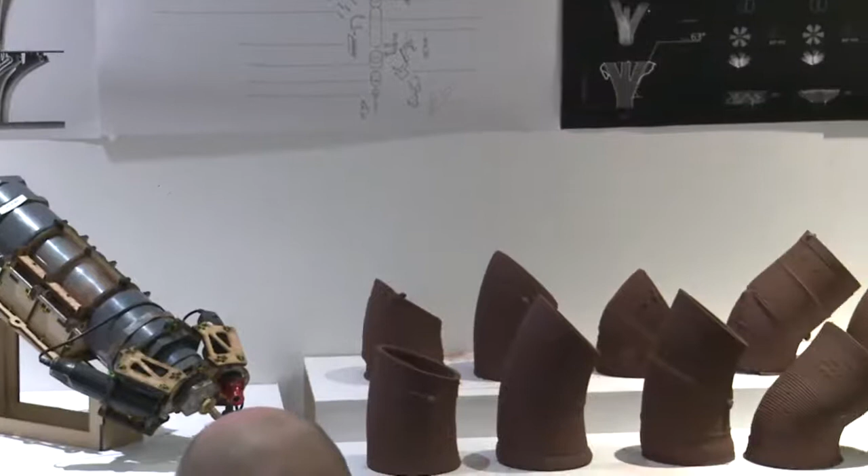Yeah, just to pick up on all the various comments that were said, firstly, I'd like to commend you on trying to synthesize the various ranges of research in social networks, printing, hardware development, material mixture development, and finally even trying to physically express some of these things and bring it together in geometry, etc. So in that sense, it's very commendable.

Having said that, there are a few things that I think maybe you can progress further in terms of the final expression of things, to utilize all of this variability, to match that with the variability that's already in the community. So you're doing that in terms of the size of spaces, but you could have done that at another level further, like where you put this kind of ornament versus that kind of ornament, etc.

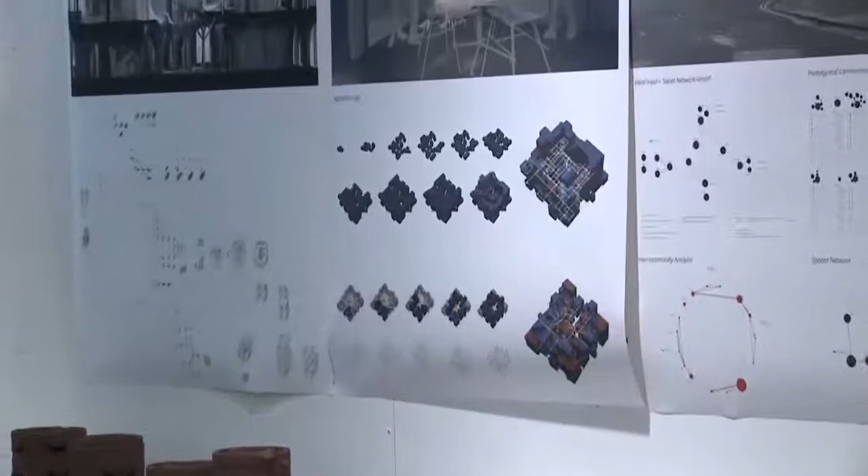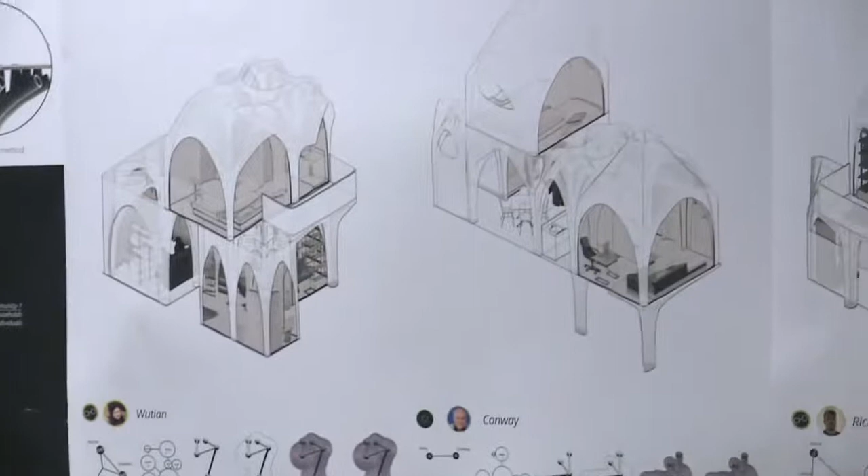All of that variability is there in that particular render, but it doesn't seem as structured as the social network that it is housing, you know. So to build that correlation, I would think it would have taken a couple more iterations. But that limitation apart, I would like to again commend you on at least attempting synthesis, which was eluding you in the summer. So congratulations.

I think naturally what you're saying and what Patrick's saying come together. The idea of material appropriation and density relative to social networking function, dark spaces leading to light spaces. I mean, just that is incredible. Plus other things which affect us all. Recycling, it's all over the news right now, how we deal with polymers in society. It's an ideal project to bring polymers into the equation as flooring surfaces, whatever.

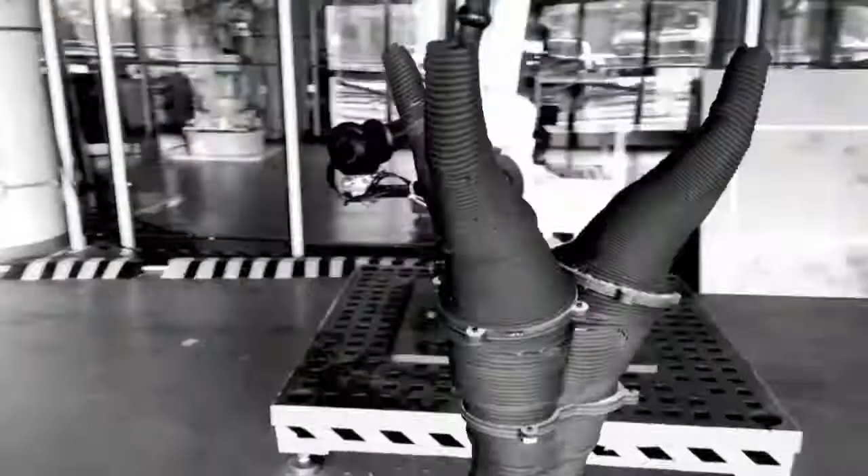You can do other things with polymers. Obviously with the melt point, if you get thermoplastics, you can do that. And there's an abundance of material. You're working with materials which are ubiquitous. It's kind of incredible for that. I feel like it's a breakthrough, even though we

all know this, we've seen it. But this is the AA, and this is DRL, and this is where you're supposed to push it, step it up in terms of how you mix these things, how you go beyond what we know, because we've been looking at the 3D printed concrete thing now for quite some time.

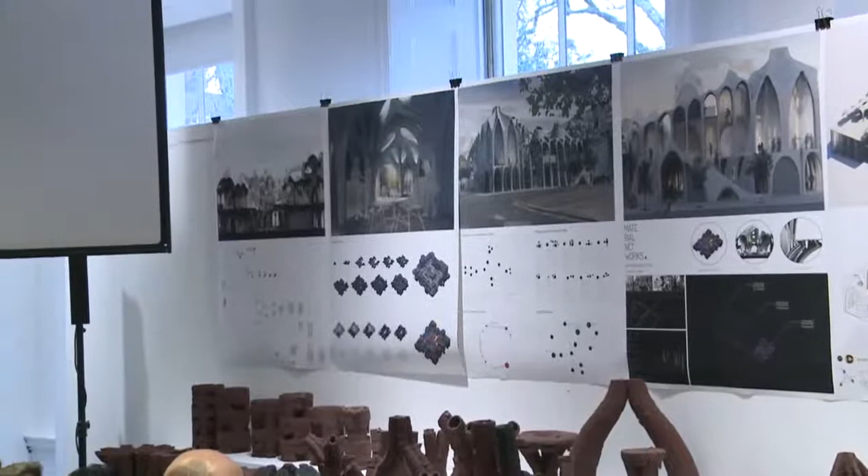So it's got to step up, and there are some issues, because if you don't fire that, then it's pretty much for hot countries. I think that's why when we look at it, we imagine the Middle East, because there's something telling us that we have to naturally fire it. But yeah, that's all I wanted to say: just step it up into other material. Use it as an incubator for everything, social housing, the whole lot, really.